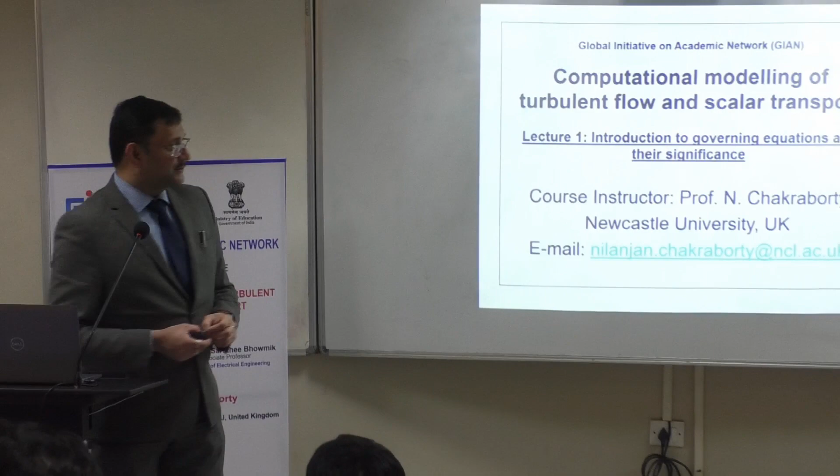In the first lecture, I'll talk about the governing equations and their significance. If we are interested in computational modeling, we will need to actually know the governing equations, because these are the building blocks, and based on that we can actually develop the concepts.

If you don't understand anything, please stop me there, okay? Roughly, the sessions are going to be one hour long, but it is not strictly one hour long, because I will take as much time as I need to actually explain the concepts. So please bear with me, okay?

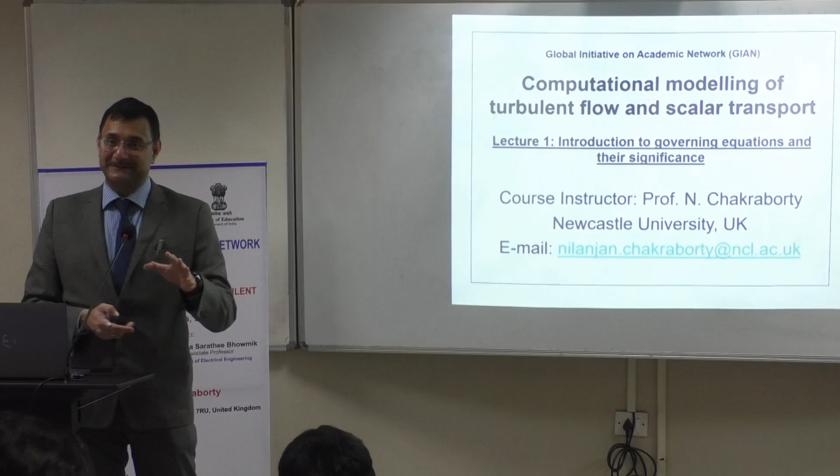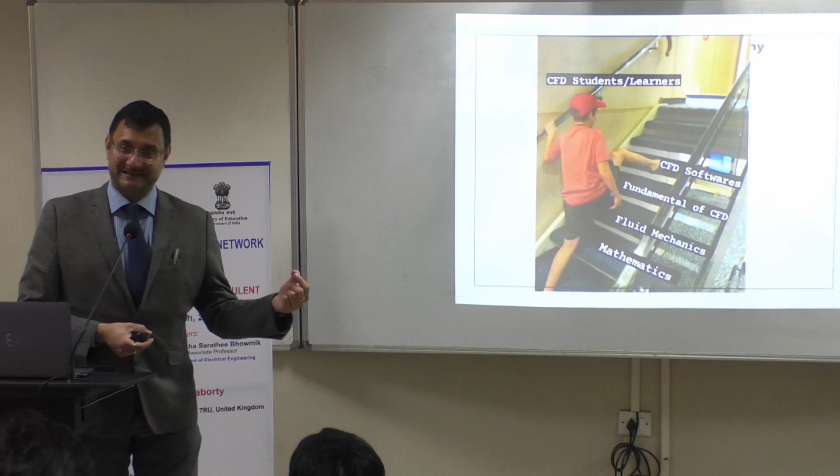Very often, whenever I see students looking at CFD simulations, I see this approach: they try to actually directly jump to CFD software without taking into account that CFD, computational fluid dynamics, is an interaction between mathematics, fluid mechanics, and the fundamentals of CFD, which is the numerical techniques. In addition to that, you have to consider the physics of fluid motion, and that's the part which I'm going to focus on in the next 5 days.

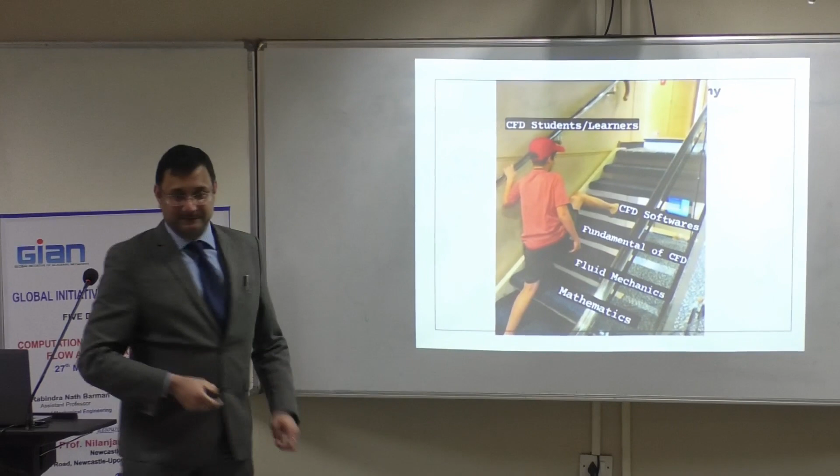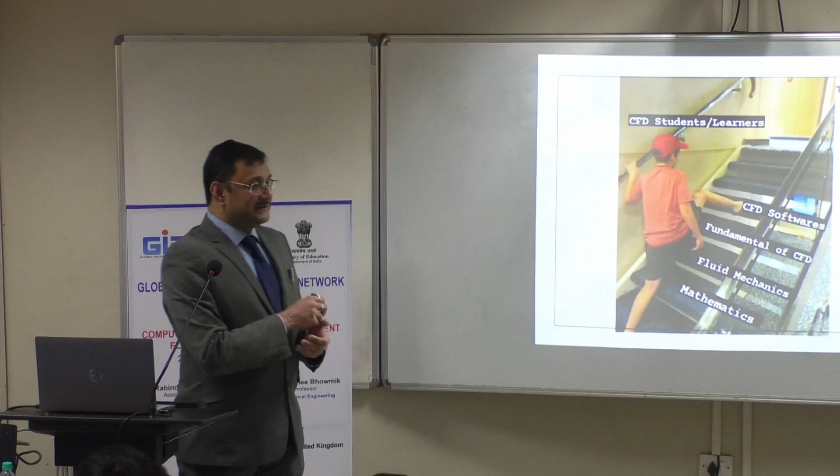Obviously, as the name suggests, I'm going to focus on turbulence modeling. But if you look at the books of turbulent flows, they mostly talk about how to actually deal with momentum transfer. They don't actually talk a lot about scalar transfer or scalar transport, and that's where the innovativeness of this course lies. You will see many of the things which I'm going to talk about in the next 5 days are not necessarily mentioned in standard textbooks.

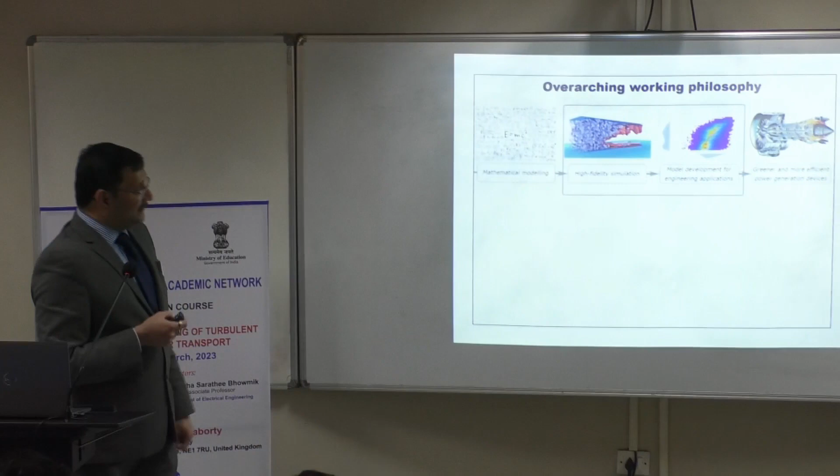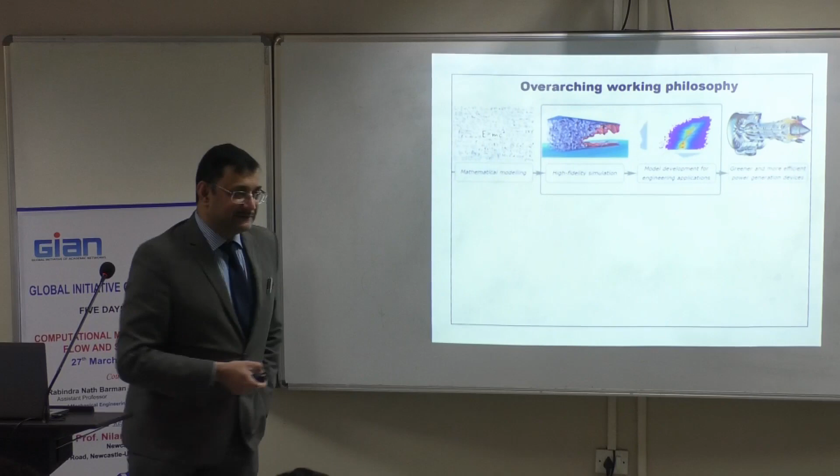So, effectively, this is the philosophy I believe in, and I believe more or less all the leading computational fluid dynamics research groups essentially believe in this kind of philosophy. Effectively, the mathematical modeling feeds into high fidelity simulation. High fidelity simulations effectively give you a huge amount of data. Intelligent data mining can lead to model development for engineering applications, and eventually they translate into engineering design of new devices.

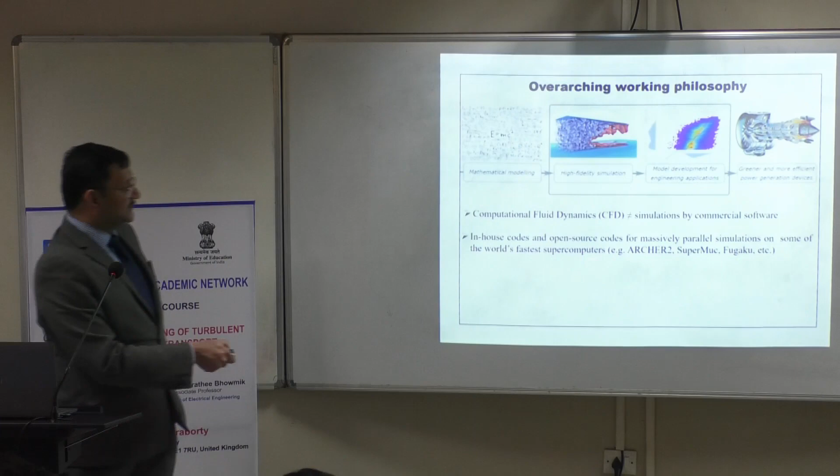This one used to be the world's second one, heavily used for CFD simulations. Frontier is number one at the moment, based in the US. The users of Frontier are some of the top CFD researchers in the world.

But in order to actually utilize these machines properly, you need to know the underlying physics of fluid flow. So essentially, that's my overarching aim for this course.

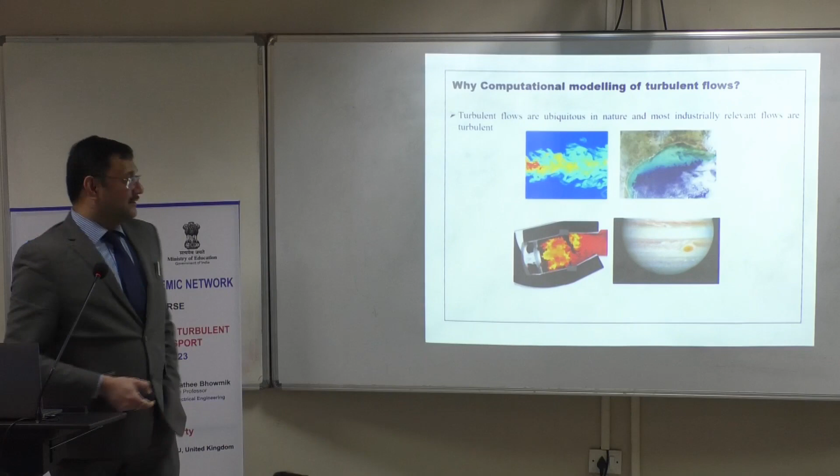So why computational modeling of turbulent flows? As you heard, it is ubiquitous in nature. Most industrially relevant flows are turbulent. You can see this is just a jet flow visualization, showing the turbulent, non-turbulent interface. If you look at Panama Bay on the top, you can see the same flow structures in this region. The same kind of thing qualitatively can be seen at a gas turbine combustor. And in astrofluids, if you think in terms of Jupiter's red spot, it is nothing but a large scale eddy.

So effectively the physics that we are talking about, you can imagine it is actually valid over a large range of length scales.

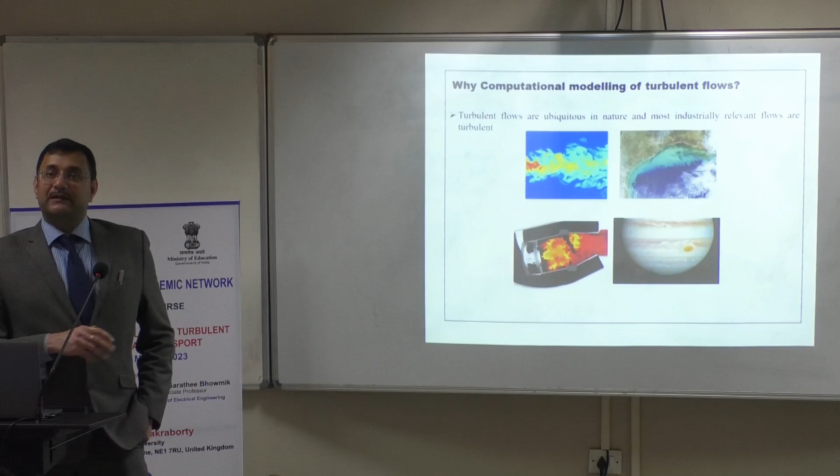Navier-Stokes equations are the most difficult equations known to mankind. The nonlinearity of the Navier-Stokes equations makes the analysis of turbulence a very difficult task. There's a $1 million prize if somebody can actually come up with an analytical solution of Navier-Stokes equations for all kinds of flows. Some mathematicians are still trying. We engineers don't care, we bypass the problem by solving the same equations by computational means. And effectively that's what we talk about. But you can actually appreciate how difficult it is.

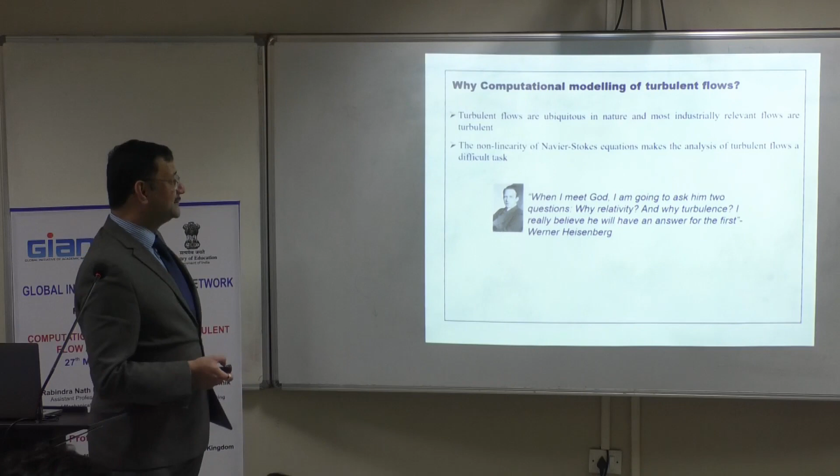Heisenberg once mentioned, when I meet God, I'm going to ask two questions: why relativity and why turbulence? And he believed that God will answer the first. So you can appreciate why we are talking about turbulence as one of the difficult problems in physical sciences.

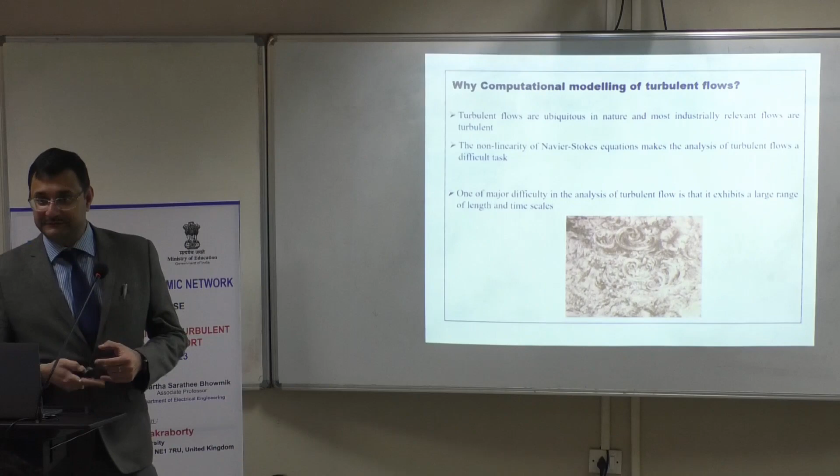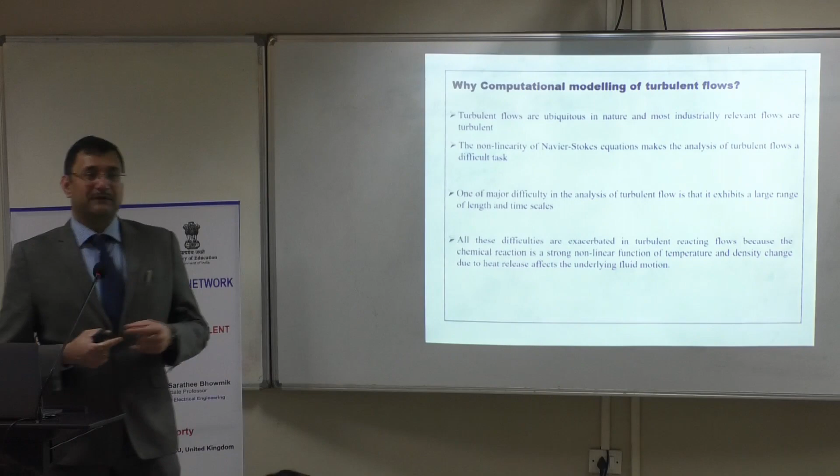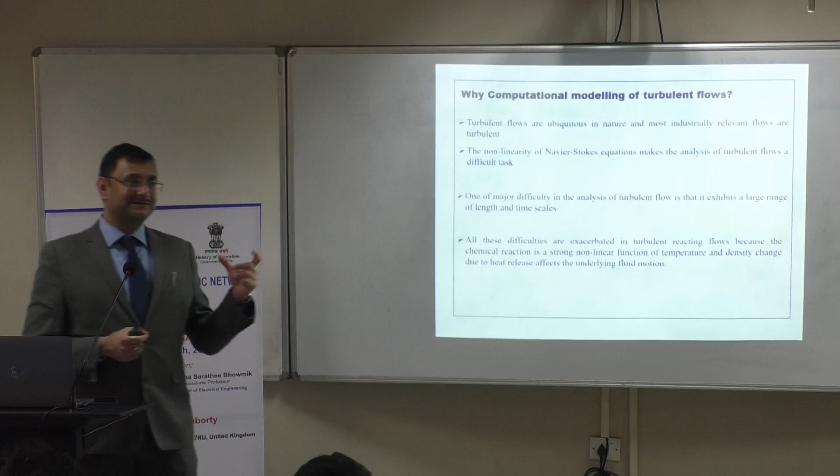So all these difficulties are exacerbated by the presence of chemical reaction in turbulent reacting flows, because chemical reaction is a nonlinear function of temperature and species mass fractions. In addition, if you have heat release it changes density, and that density effectively affects everything happening within the flow. So it is a closely coupled system. It will happen even in natural convection, but in the turbulent reacting flow, the interaction between the energy equation and the rest of the governing equations is much stronger.

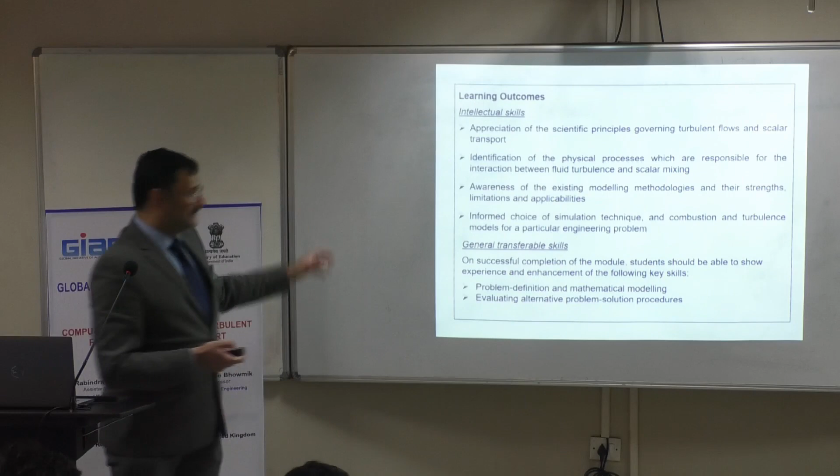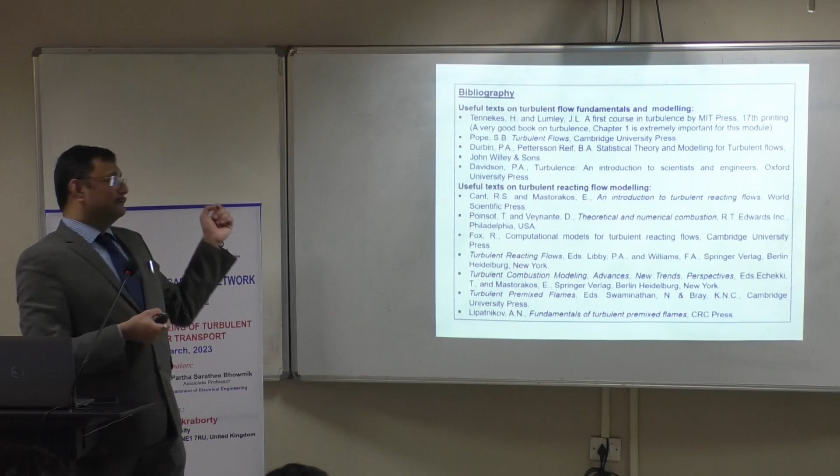I think this bit is important: everybody actually looks at turbulent flow differently because it's a difficult issue. Everybody approaches it from a different point of view. I've been very lucky to actually interact with some of the people who actually wrote these books. And very often, some of them were really annoyed if I was actually looking at somebody else's book.

So there are strong feelings between people. So personal preference matters in turbulent flow research, but we are talking about science here. So I have tried to filter out my personal opinion on the subject. I'll present you with the facts, but all of them are good books, even though some authors don't like other authors' books, there are advantages and limitations in all of them. Not expecting you to read all of them, but if you can, great.

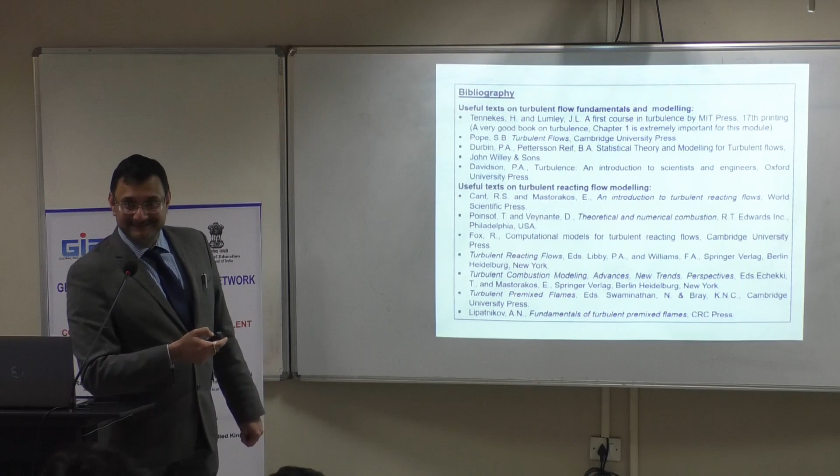So starting point: governing equations, numerical simulations, model development for engineering calculations - that's what the logic is. And that's basically the logic which I follow in my research.

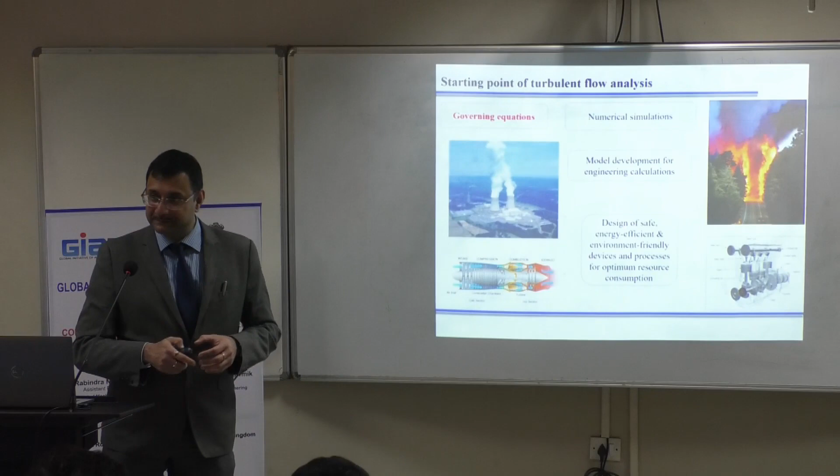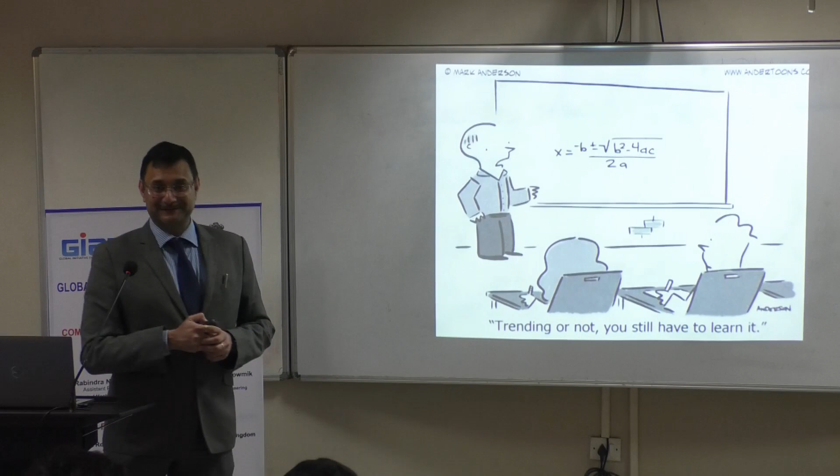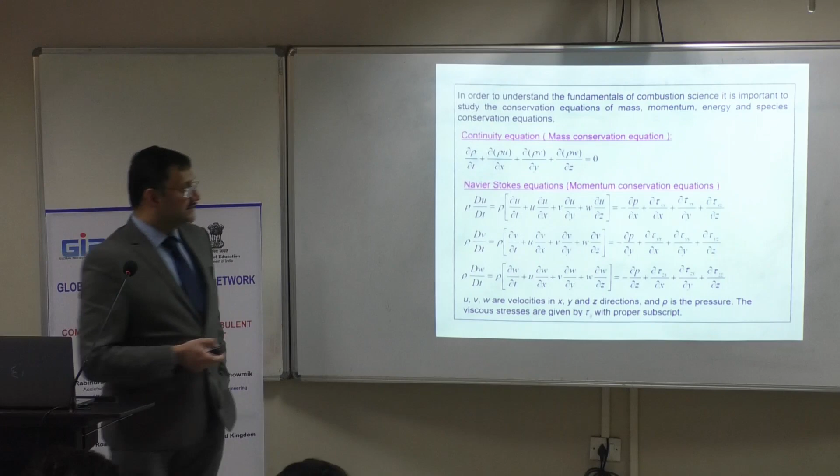So now we'll start talking about the equations. As the slide suggests, whether it's trending or not, you still have to learn it. Probably this is going to be nothing new for most of you, but I think it is important to recapitulate. We'll talk about mass conservation equation, momentum conservation equation. Altogether, all of these things are referred to as Navier-Stokes equations. I'll use tensor notation heavily later on, so I'll expect you to know about tensor notation.

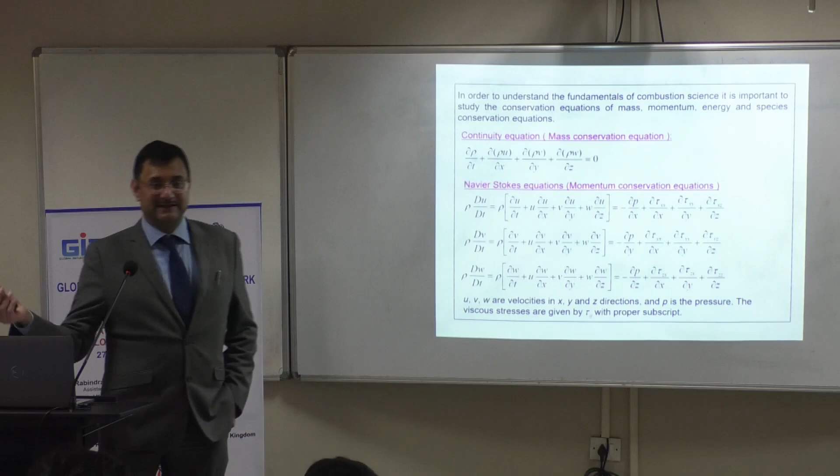Navier-Stokes equations are nothing but Newton's second law of motion written for fluids. In Newton's second law of motion, we generally write F equal to ma, F being the force, m being the mass, a being the acceleration. Here, effectively, what you are seeing is mass times acceleration divided by volume, that's why density appears. And that effectively means this side is force per unit volume on the fluid.

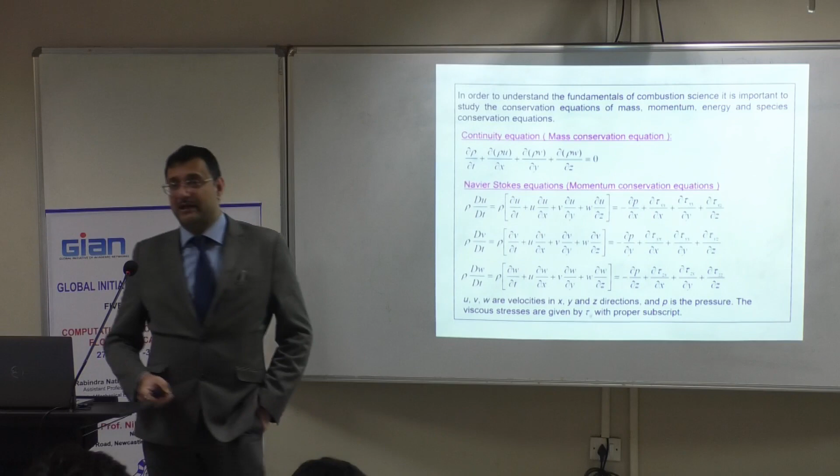Force comes because of the pressure as well as the viscous action, and on top of that you can have body forces. So that's what is referred to here.

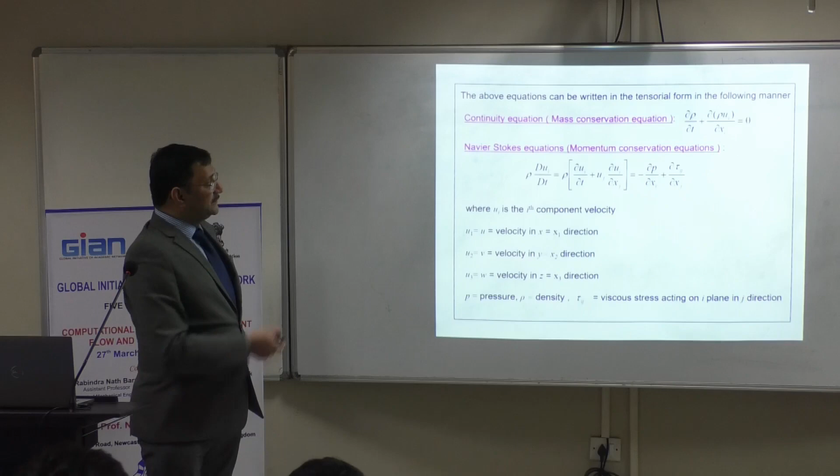I will use tensor notation as I mentioned earlier, so in tensor notation those equations can be referred in this manner.

Let's talk about the derivation of these equations, because I, both as a student as well as a researcher, found the derivations extremely insightful. If somebody just throws the equations at you, it's very dry stuff, because you don't have an appreciation for where the terms essentially come from. That's why I want to address this.

Most of us, when we were kids, played with little blocks and made some arbitrary shape. If we consider this as one of our little blocks, and this is a block of fluid, and we have several of them, we can make any flow configuration. So if our governing equation is valid for a small block, it should be valid for any arbitrary shape.

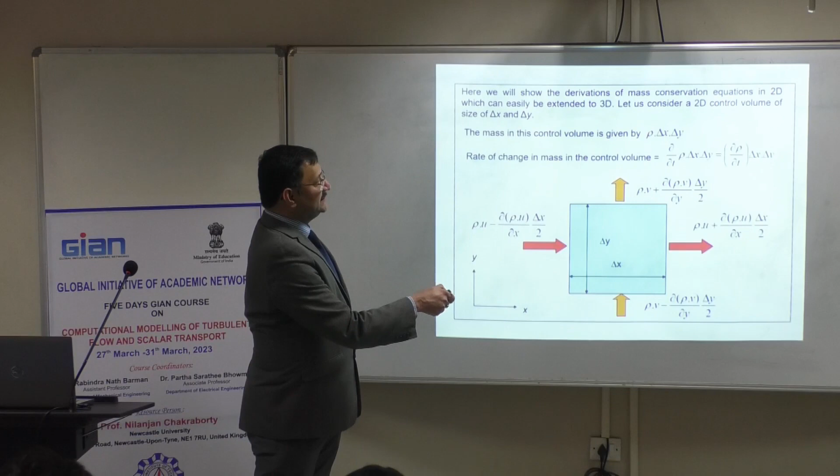The total mass within the control volume is density times delta y times delta x. If we consider unit depth normal to the board, then delta x times delta y times 1, which I did not show, is the volume times density, which gives us the mass.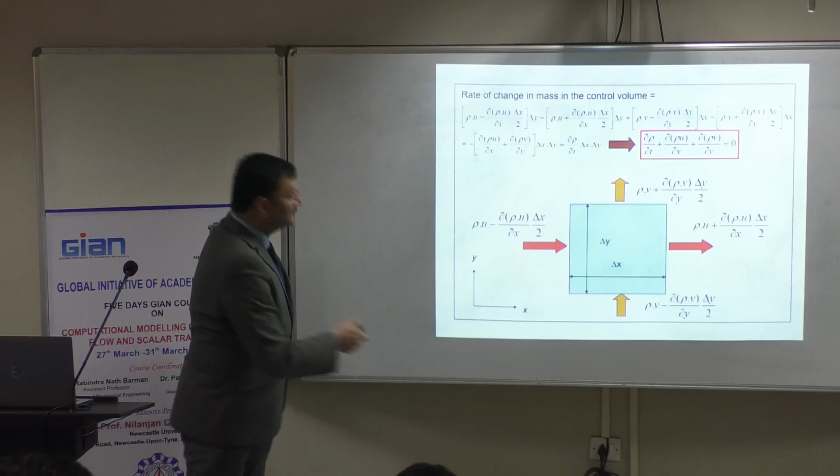Now, rate of change in mass within the control volume. This is the mass flux, so the area for that is delta y times 1. This one is coming in, that's why positive sign. This one is going out, that's why it's again multiplied with delta y because this is the area we're talking about, but with a negative sign.

For this one, the area is delta x times 1, but it's coming in, that's why positive sign. This one is going out, that's why negative sign. Clear?

If you do the algebra, it gives rise to the rate of change of mass within my control volume. Now, I have already drawn my control volume, so its shape is not changing with respect to time. The rate of change of mass within the control volume can only take place because of the rate of change of density within the control volume. That's why it's given by del rho del t times delta x times delta y.

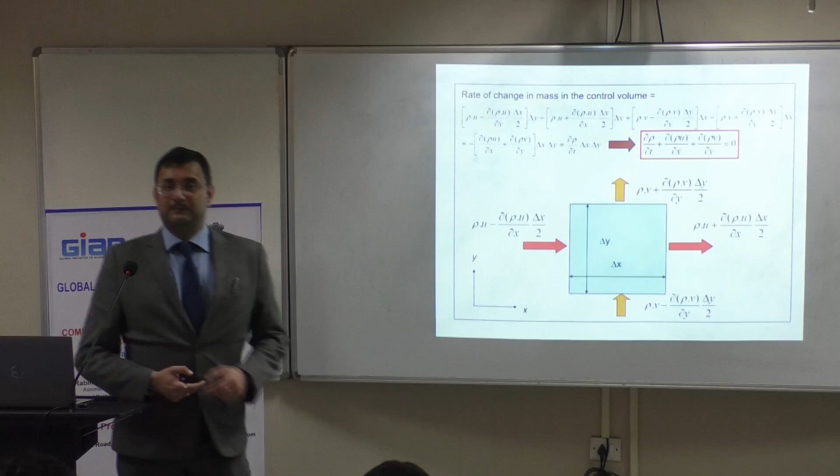If we consider these two together, ultimately we'll end up with this equation, which is our well-known mass conservation equation for 2 dimensions. You can do the same thing in the 3rd dimension and you will get the mass conservation equation. Any issues with that?

Now let's move to the momentum conservation equation. This time it will look a little bit different. Again, I'm starting from the center of this control volume. Let's consider the momentum — momentum is a vector, so we are considering only the x component, just for demonstration purposes.

Rho times delta x times delta y times 1, which I have not shown, gives us the mass for the control volume. Mass times velocity component u gives us the momentum in the x direction.

As I told before, I have drawn delta x and delta y beforehand, so the control volume is predetermined. So if I take the derivative, delta x times delta y will come out of the derivative — del t will only act on rho.

Rate of change of momentum — let's see what happens then. Rho u square is the momentum brought by the flow in this direction. But why del x times delta x over 2? Because I'm doing Taylor series expansion with respect to the middle point. Similarly, this one gives a similar contribution, but this time with a plus sign.

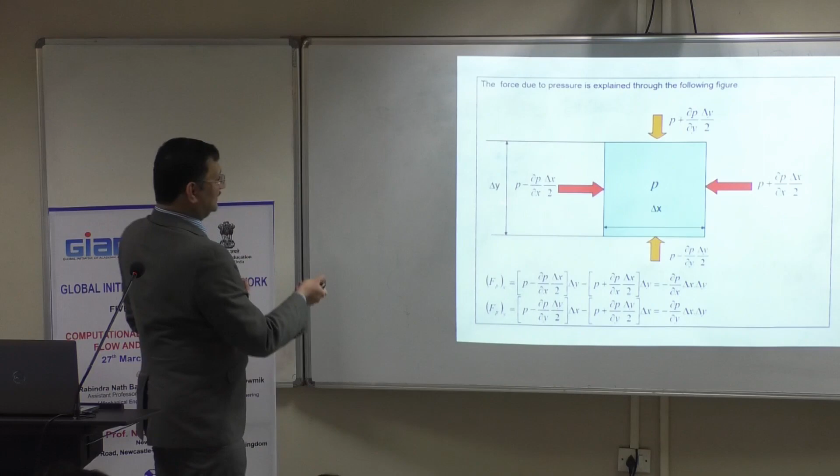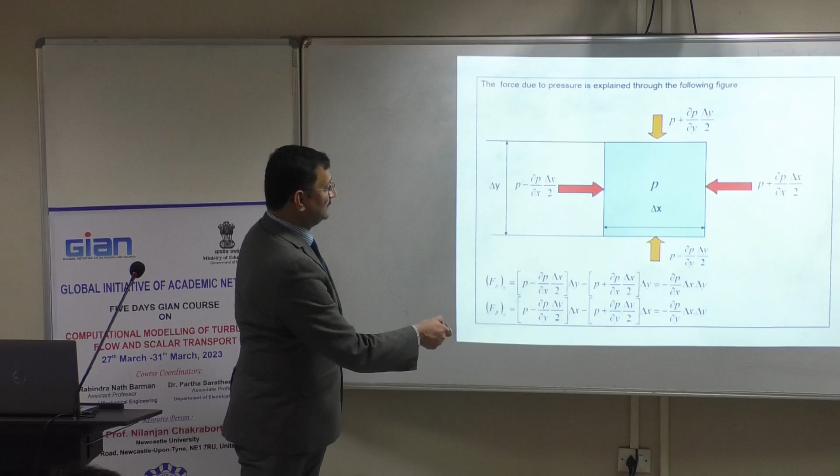Pressure always acts in the inward direction, so effectively it acts in this direction for this face, in this direction for that face. So the net force because of pressure in the x direction is this times this area, which is delta y times 1, minus - since we're talking about positive x direction but it's acting in the negative x direction - this times this area with a negative sign. After a little algebra we get this. Same concept: this works in the positive y direction times the area, this works in the negative y direction with the area, and you get this.

You must have seen this several times in your solid mechanics, Mohr's circle and so forth. But effectively we're talking about continuum mechanics - whatever you learned in the solid mechanics course applies here as well in fluids.

So tau xx is the normal stress coming because of the viscous action. Doing Taylor series expansion, it becomes tau xx plus delta. Similarly tau yy is the normal stress for the y direction - here it is tau yy plus delta yy delta y. You have shear stresses as well.

They are shown with the green arrows. So if tau xy is the shear stress in this direction, you know the complementary shear stresses. Effectively here it's going to be the other direction, tau yx plus delta yx delta x. Tau yx is working in this direction, meaning here the term looks like this.

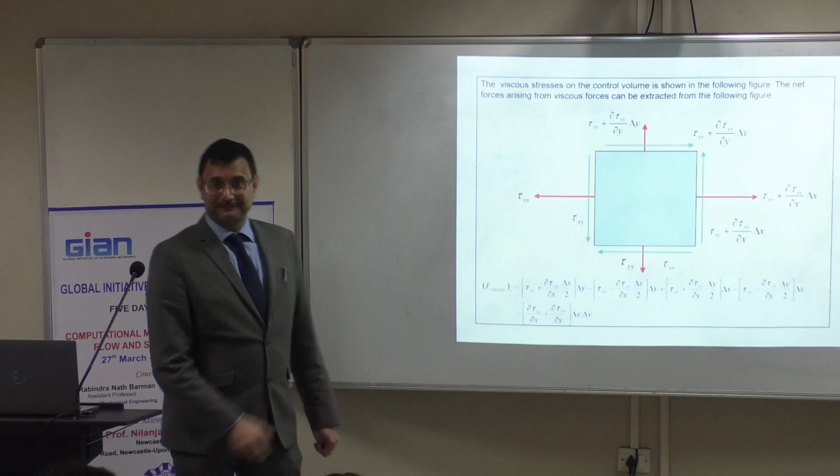Now if we're interested in the x direction: this stress times this area, minus this stress times this area - that's the positive x direction. But in addition to the normal stress contributions, we have to consider the shear stress contributions as well. So this green component times this area, this green component times this area, but in the negative x direction. If you do a little bit of algebra, it gives you this.

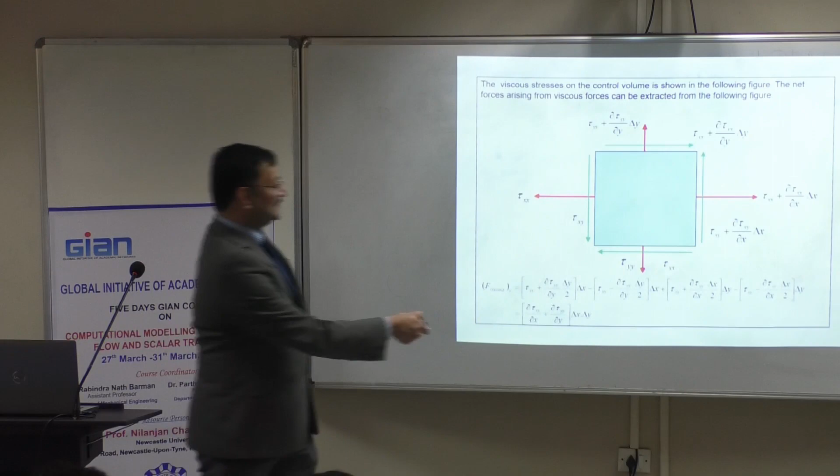Similarly, for the y direction, it is working in the positive y direction. So this times this area minus this times this area, because this is working in the negative y direction, and this one is working in the positive y direction. So this times this area, which is delta y, and this times this area, but with a negative sign, because it's working in the negative y direction, gives you this.

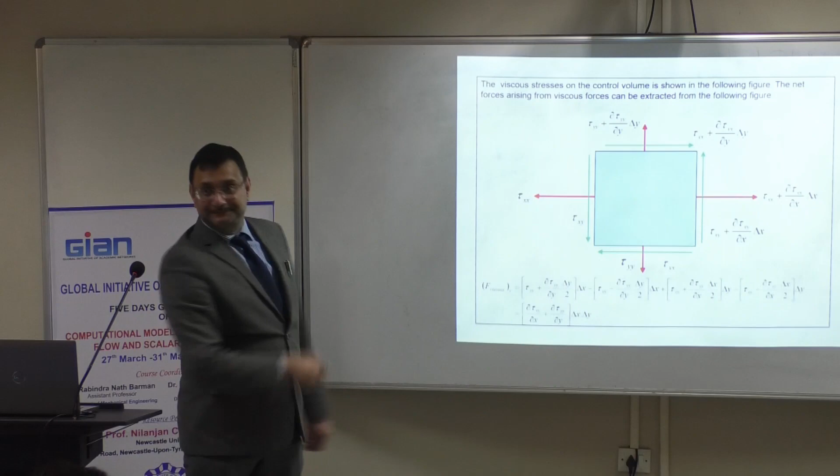But hopefully the idea is clear. Now, the way I have shown this equation, they are called conservative forms, because they are directly coming when I am considering conservation of momentum.

But we have already shown, because of the continuity or mass conservation equation, this is identically equal to 0. So I can actually drop this, to 0. But at this point, a cautionary remark: you can only do that for single phase flows.

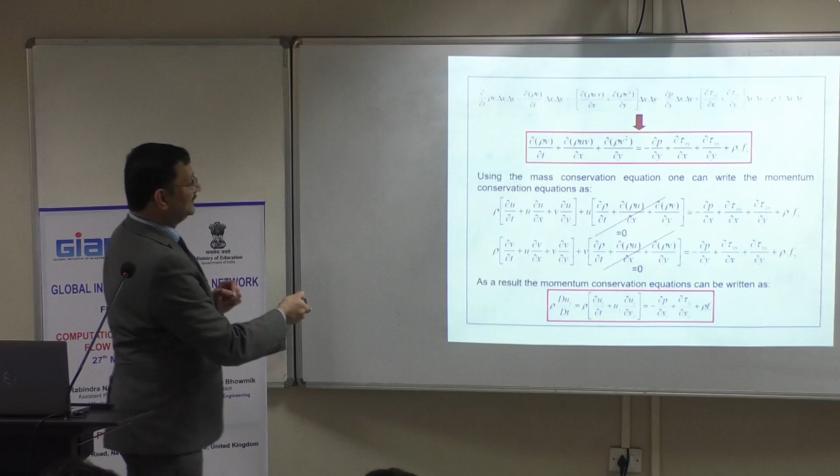But if you are writing simple single phase, then this part goes to 0, and effectively this equation boils down to this equation. In other words, this part is nothing but our well-known material derivative or substantial derivative or total derivative, whatever name you want to call it.

Just for completeness sake, because I have found in 20 years' time, sometimes these things are not mentioned. Maybe that's not the case for you, but I'm not taking any chances. But what's the difference between here I have the time derivative, and here I have a time derivative? What's the difference between these two?

Effectively, often in physics, we actually look at a given point in our system, and we are essentially seeing what happens at that given point. It's equivalent to, I have a pipe, I'm putting a probe at a certain location. So I'm actually seeing different fluid elements passing through that point at different time instants. Clear? And that's what I'm measuring.

That's called the Eulerian frame of reference. So effectively, when I'm talking about this term, I'm looking at the change in velocity with respect to time in the Eulerian frame of reference. For convenience sake, we generally use the Eulerian frame of reference in fluid mechanics most of the time.

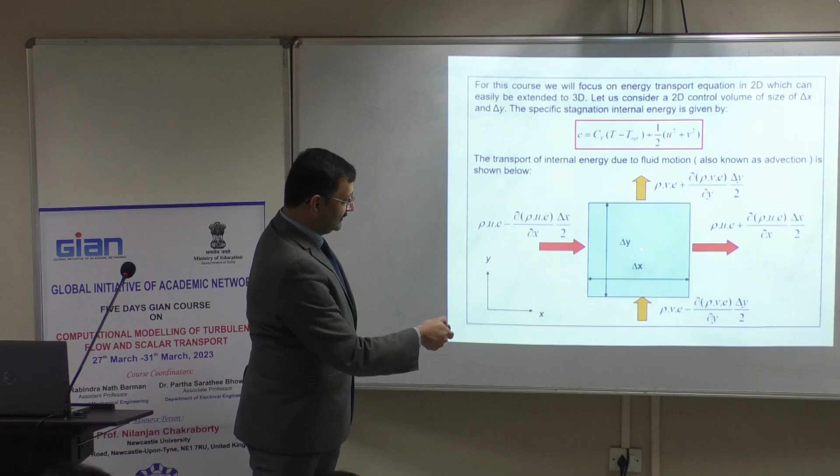Ignoring the higher order terms, here it becomes plus, here it is negative, because I'm doing it in terms of this direction, this distance, that's why minus del y over 2. Here the component is plus. Clear?

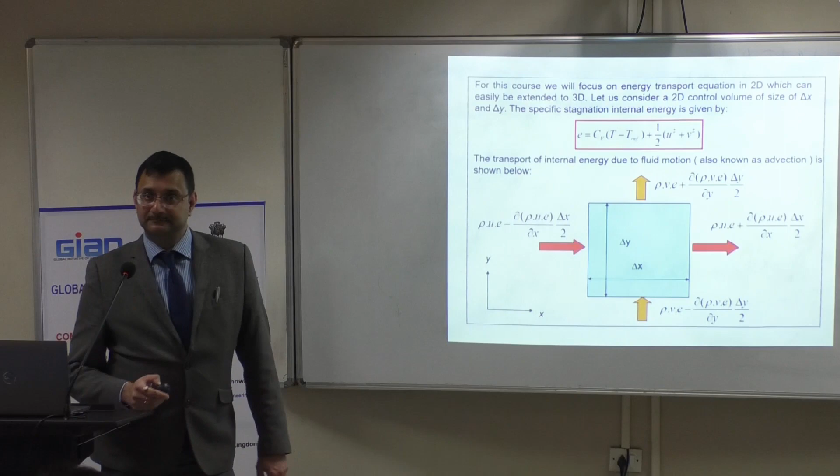I'm doing first law of thermodynamics once again. Think about your bank balance this time. There are ways to actually express first law of thermodynamics, but ultimately it is nothing but bookkeeping of energy.

If you understand how your bank account works, you know how first law of thermodynamics works. Heat transfer is your income, that comes in your bank. You actually spend for your mechanical work. The flow is bringing some amount of energy, so this gives a positive contribution when multiplied with the corresponding area. This is going out, that's why negative sign. This is coming in, so this times this area positive. This is going out, that's why. So all incomings have positive sign, all outgoings have negative sign. That's what happens in your bank account, isn't it?

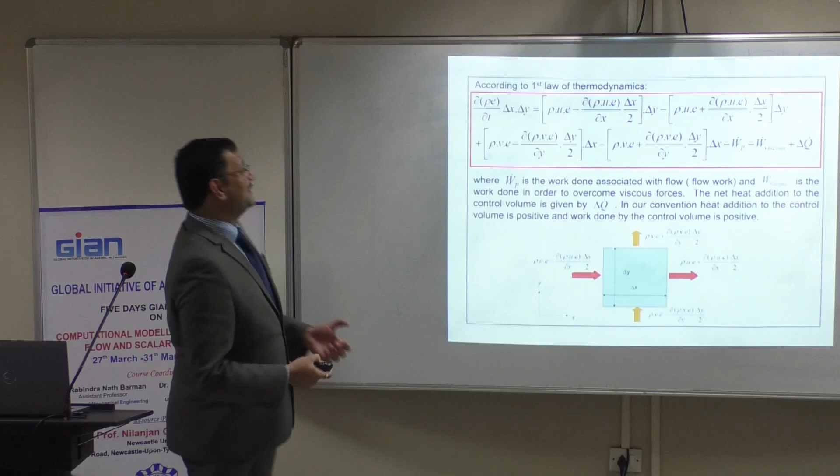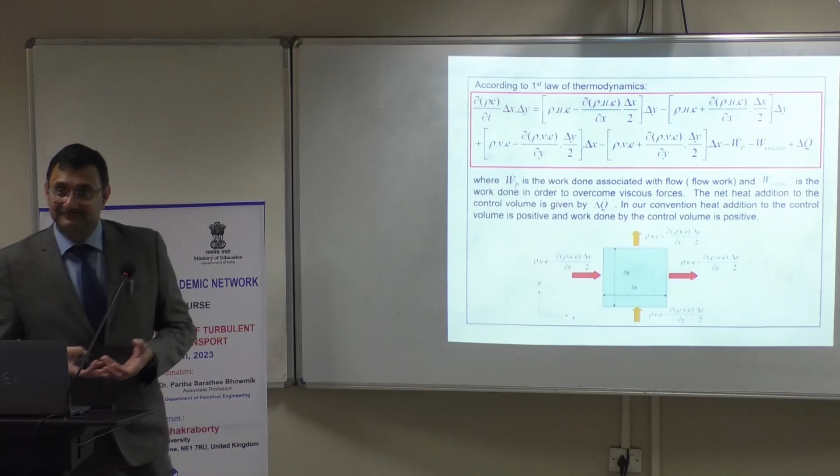If the net contribution is positive, our control volume becomes richer in terms of energy. If your income is greater than your expenditure, your bank balance goes up, you become richer. In our context, the system becomes richer in terms of energy, reflected in rising temperature. If your expenditure is greater than your income, your bank balance goes down, you become poorer. Similarly, our system becomes poorer in terms of energy, reflected in decrease in temperature with respect to time. That's all it is.

Let's find out heat transfer. So I have, let's say, this is volumetric heat generation that can be heat released into combustion or reacting fluids. Can be something else as well.

If I consider this is my diffusive heat flux and Qx is the value at the middle of the domain, heat flux is a vector, that's why subscript x and y. So this is the value on this face. Again, I'm doing Taylor series expansion. Similarly, this is the value on this face. For the y component, this is the value for this face. I have explained several times, so I'm not repeating it again. And for this one, similar things, but with a positive sign.

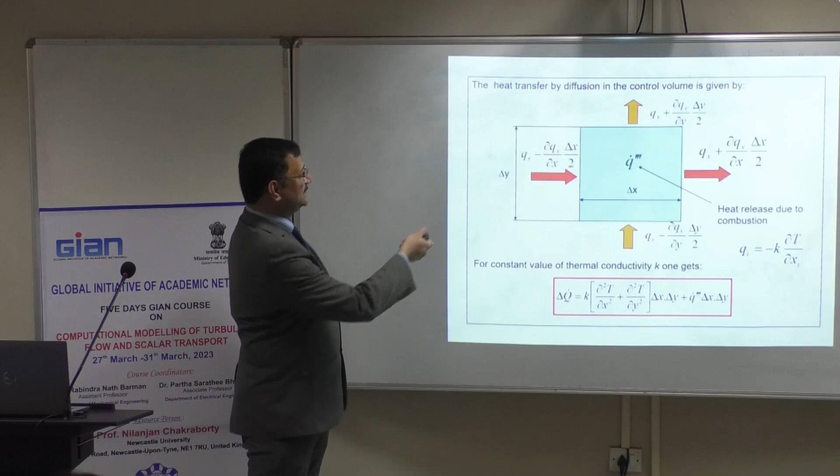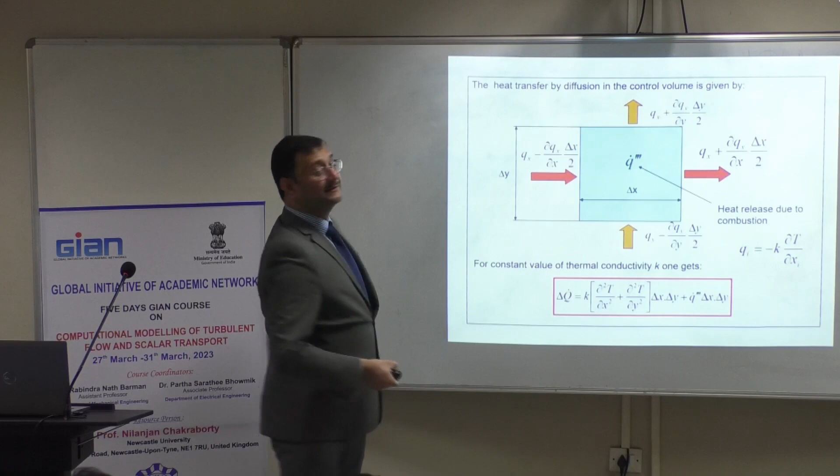Clear? Net contribution, whatever is coming in. So if this is coming in, this times area, this is going out, so this times the area subtracted. This is coming in, so this times this area with a positive sign, this times this area negative sign. And then if we use Fourier's law of heat conduction for the heat flux components, we end up with this.

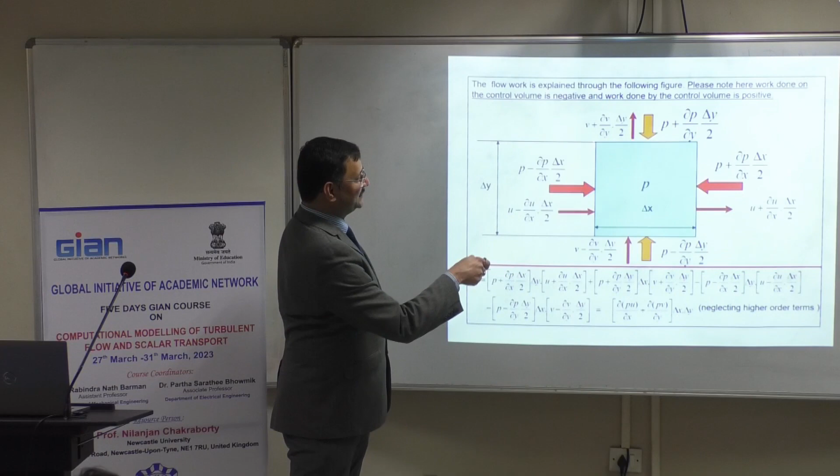Because we are talking about power here, we are not talking about work. That's why the velocities are coming in rather than displacements. So this one will give you negative work, this will give you positive work, this will give you negative work, this will give you positive work. And how do you get the work? Essentially, this pressure times the area gives you the force, force times the velocity gives you the power. And if I do this, then I'll end up with this expression.

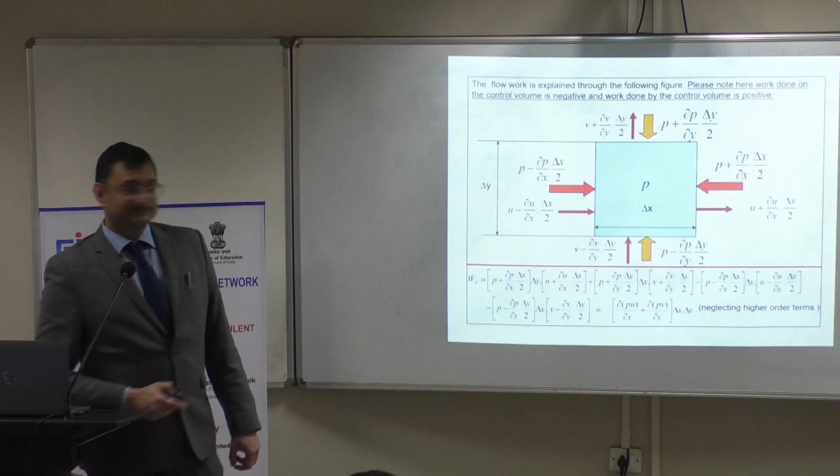Viscous forces and the velocities are shown here as well, same convention as before. So if you actually put the same convention, again multiply the stresses with the corresponding area, after a little bit of algebra, you will end up with this.

Now, if we put all of those things into our energy conservation equation, this is what we get, dx. That's the complete form of energy equation.

In the literature, there are various ways of writing the energy equation. Each one differs from another by a slight amount, which often confuses people. But effectively, all of them are talking about the same thing.

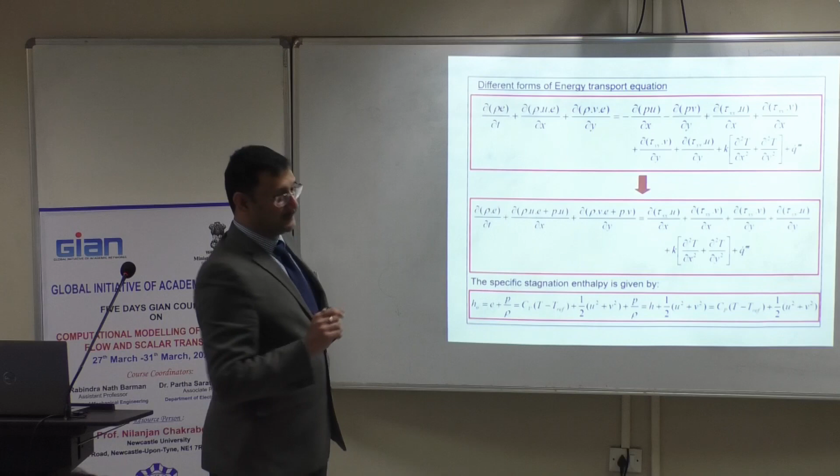You can appreciate these terms are basically originating from fluid coming into the control volume and going out of the control volume. This is essentially telling the transport process by virtue of fluid motion, which is often referred to as the advection process.

These terms originated because of thermal conduction or thermal diffusion. They are referred to as the thermal diffusion term.

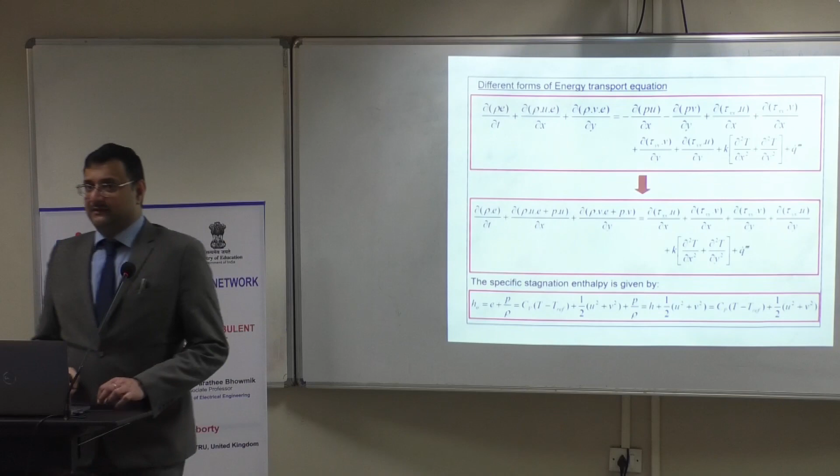These two terms, the pressure contributions, are essentially the contribution the flow needs to make in order to sustain the flow. It's the flow work part. And this is the viscous work part. Effectively, because of that action, mechanical energy converts into heat energy.

So if I actually take these terms on the other side, we will get this, and that gives us the specific stagnation enthalpy, where Cp is the specific heat at constant pressure.

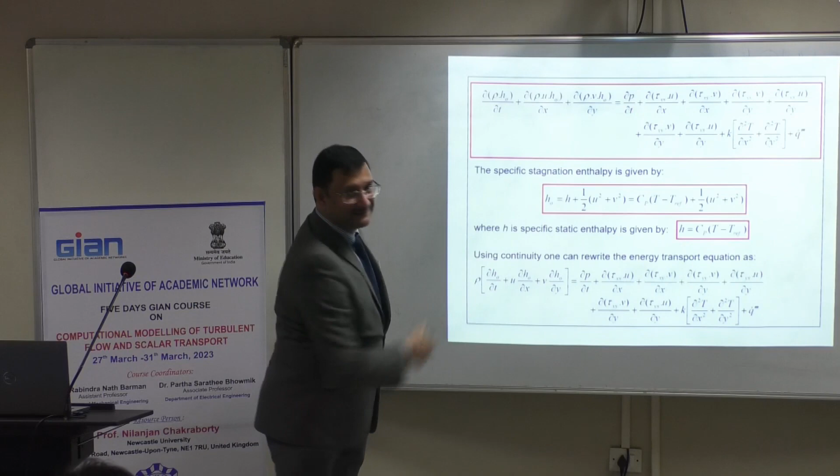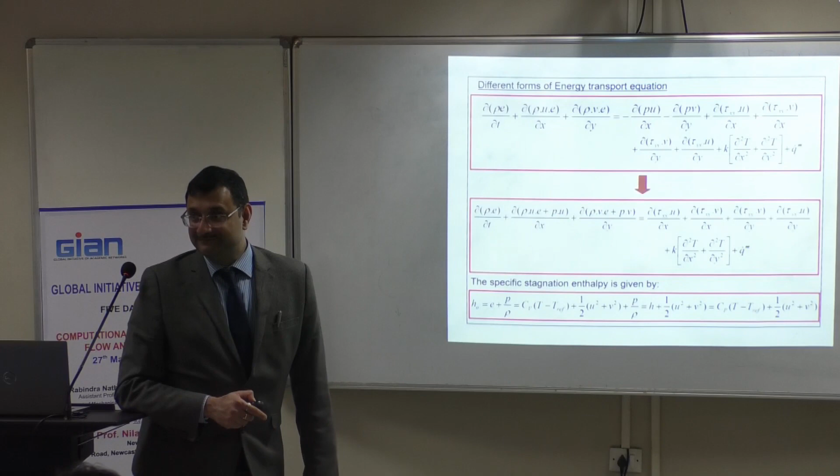And then one can actually write this equation. But please note, this time there is a sole del P del T term on the right hand side, which was not there when I wrote this in terms of the specific stagnation internal energy. Everything else looks more or less the same, but suddenly one extra term has originated. It's talking about the same physics, just writing the equation slightly differently. So please keep that in mind.

If I write this equation for static enthalpy, at the moment it's written for the specific stagnation enthalpy as shown here. And if we use continuity once again, this is written in conservative form, you can get this equation.

Because of the chain rule, effectively this part will boil down to this. And if you write the same equation now by expanding the kinetic energy part, and for these parts effectively use the momentum conservation equation.

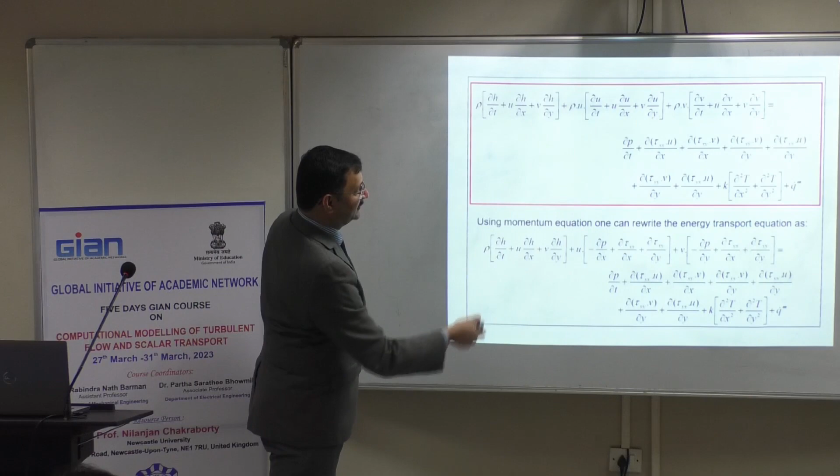So you replace this on the left hand side. You can compare, this is the right hand side corresponding to this. Take the left hand side, it's the corresponding right hand side. This boils down to this, and you get this expression. Again, the same equation physically remains exactly the same thing, but looks slightly different.

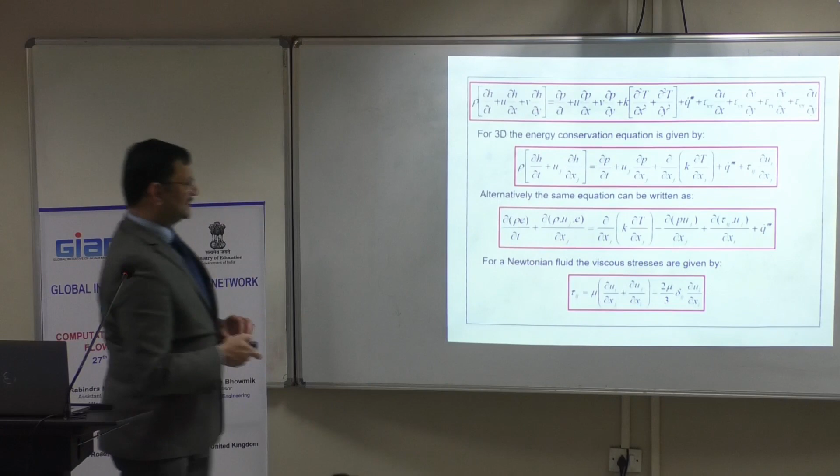Alternatively, you can actually write the same equation in this form. Now, you need to appreciate one important thing at this point. So far, whatever I have talked about...

...is valid for all kinds of fluids: Newtonian, non-Newtonian, incompressible, compressible. Single phase is the only limitation. Otherwise, you'll have some extra terms.

At this point, this is the first time I'm making an assumption. So what exactly is the contribution by del P by del T here? It depends on which application you are seeing. If you have a non-dimensional number called the Eckert number, and it's a very high Eckert number, you will have that contribution playing an important role.

In the case of incompressible fluid, that contribution is often negligible. Essentially, you can drop quite a number of terms from this equation. If you do an order of magnitude analysis, you will see this term and this term often will drop out. But that is not necessarily the case when you are talking about compressible flow or high-speed flows. This term may play a very important role for very low Reynolds number flows.

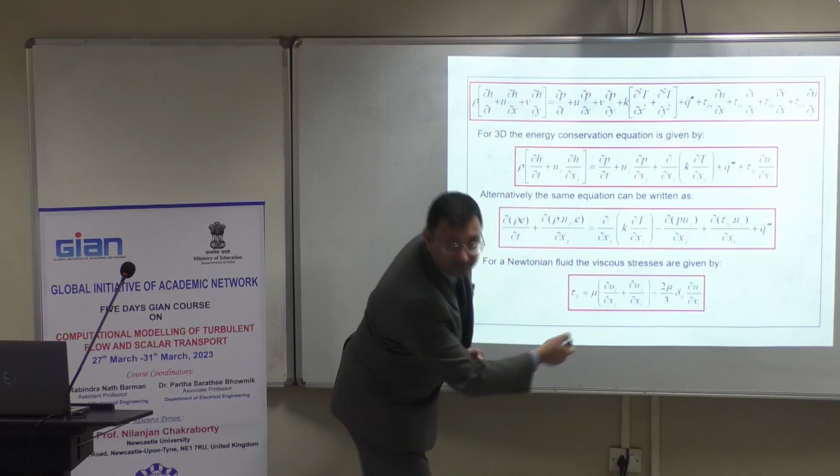If I'm dealing with a non-Newtonian fluid, this relation will change. So the resultant equation from this point will differ depending upon the fluid that you have. For incompressible flow, this contribution will go away, because the divergence of velocity field, we can show for incompressible fluid, divergence of velocity field goes to 0.

Now, if you are dealing with reacting flow, like combustion, the volumetric heat generation is not constant. It changes from one place to another. How can you actually express that?

Let's say I can actually express that with a fuel reaction rate times the calorific value of the fuel in this manner. Why negative sign? Fuel is a reactant, it's consumed, so this quantity has a negative sign. So negative makes it positive. It releases heat.

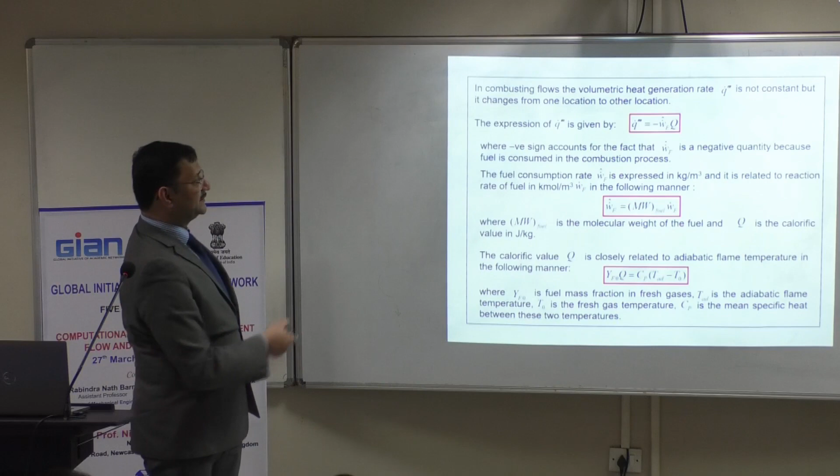How do you get that? As indicated, this one is expressed in kg per meter cube, and here effectively this one is in terms of kilomole per meter cube, and this is molecular weight.

How is Q considered? In this manner, YF0 is the fuel mass fraction in the unburned gas. Cp is specific heat at constant pressure. T0 is the unburned gas temperature, and T adiabatic is the adiabatic flame temperature.

If you have done chemical thermodynamics, you should be able to relate to those. So effectively, if you have a chemical reaction like this, you can write this quantity like this, and your Q becomes this, if A is the fuel.

This quantity, which is the volumetric heat generation, is expressed as the summation of the heat of formation and the reaction. Clear?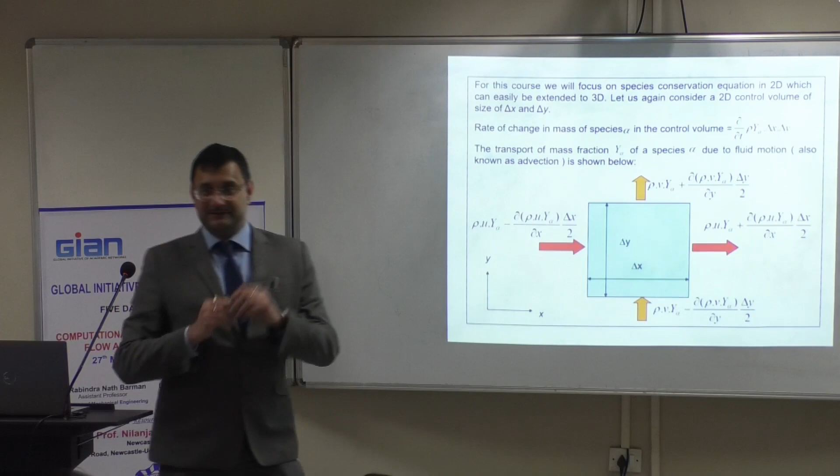But if you have a mixing problem or a chemically reacting system, we have talked about mass conservation, momentum conservation, and energy conservation. That's not enough, because we need to consider species conservation as well, since you will have different concentrations of different reactants or products at different locations. That's why we have to consider species conservation.

Species conservation is very similar to mass conservation that we discussed earlier. When talking about species conservation, think about this control volume. Once again, rho times delta x times delta y times unit depth gives you the total mass of my control volume. Y alpha is the mass fraction of species alpha.

So the amount of alpha remaining within the control volume is given by rho y alpha delta x times delta y. The rate of change of that with respect to time is given by this. I have already explained delta x and delta y are constant because I defined my control volume like that.

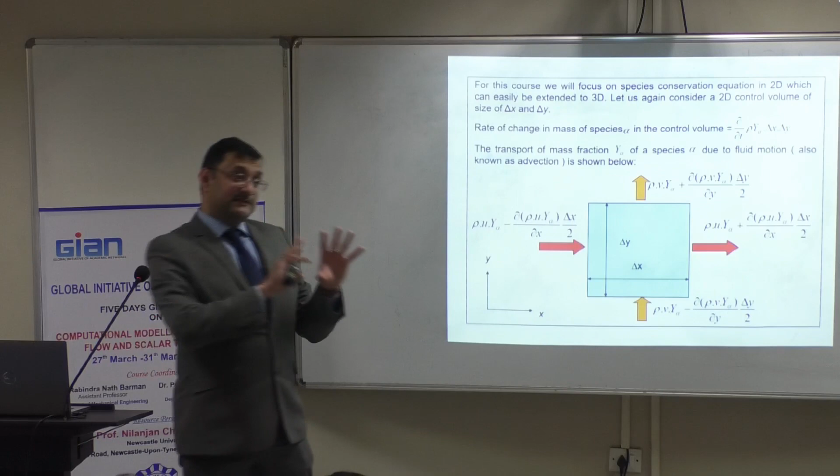This comes from what I talked about, the Eulerian frame of reference. That's why I have considered my control volume as predetermined. I could change the shape of my control volume as a time-dependent thing, which would bring extra terms into my consideration. Most of the time I don't need that, but that option is there.

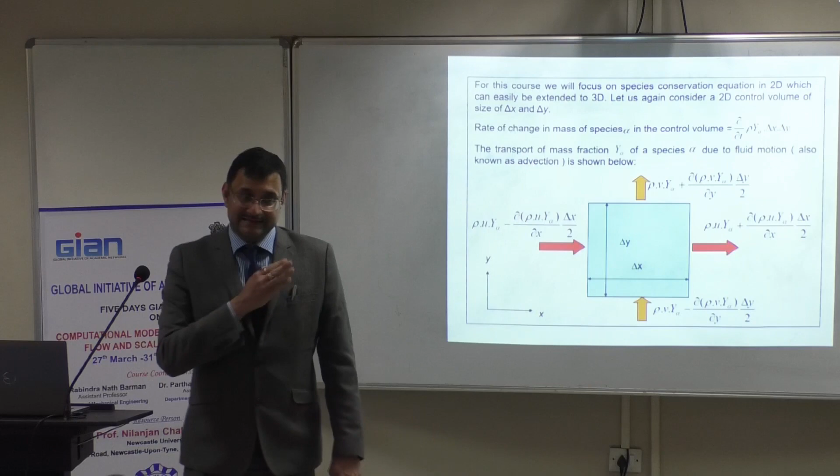Rho u y is the mass flux because of the fluid motion in the x direction. Similarly, rho v y is the mass flux in the y direction. I'm doing Taylor series expansion once again from the center of the control volume, and that's why I'm getting this contribution, this contribution, this contribution. I've discussed it enough, so hopefully you can follow that.

Now, this is my mass transfer flux. Again, if I consider mx and my at the center of the control volume, these are the mass fluxes in the x direction, y direction boundaries. And I have generation rate or destruction rate of alpha. Clear?

How do I define that mass flux? Using Fick's law, to be specific, Fick's first law of diffusion. But there are, again, at this point, I am making an assumption. There are more complex, more detailed ways to actually express that.

So, now, once again, that bank account analogy. Whatever is coming in, positive sign; whatever is going out, negative sign; plus whatever is generated. Unfortunately, that doesn't happen in your bank account. It would have been very good to have that, right? So once you do the simplification, you end up with this, and that brings us to this equation.

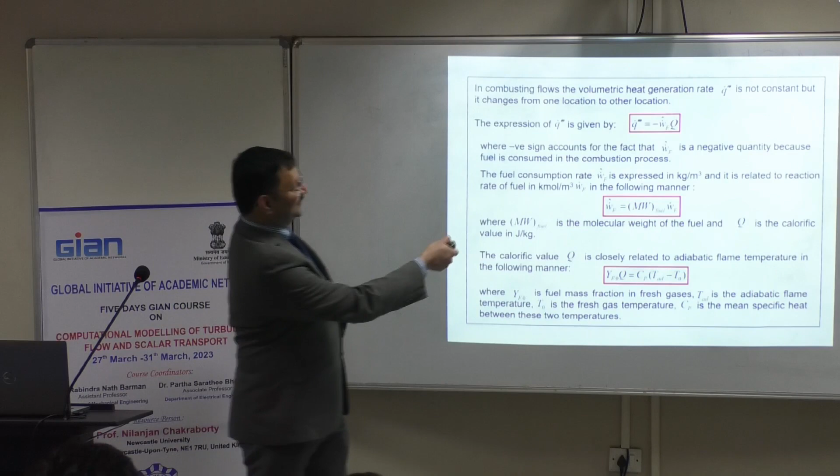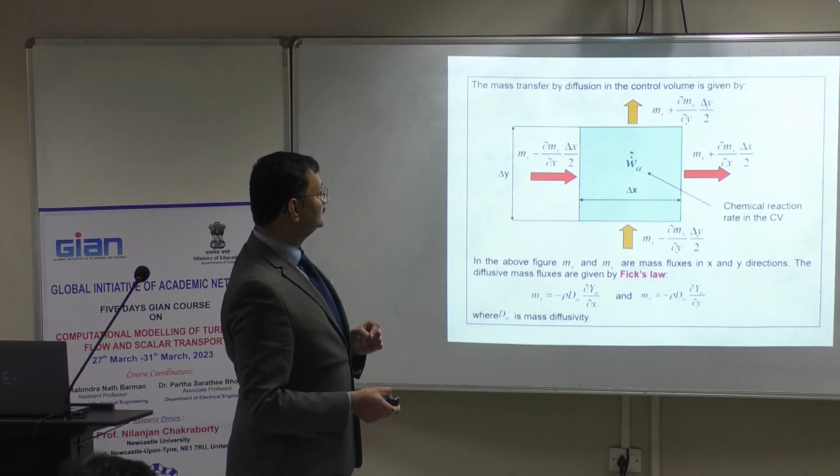This term is related to, you may remember, the heat release term. So that means if the reaction rate changes, it changes. These are the stoichiometric coefficients, the balanced chemical reaction. So please keep in mind what I was telling, that this changes the chemical reaction. Chemical reaction essentially changes the heat release rate term. If heat release rate is changing, that will affect temperature. Temperature, through the state relation, like ideal gas law P equal to rho R T, will change density. Density will change, will induce change in velocities.

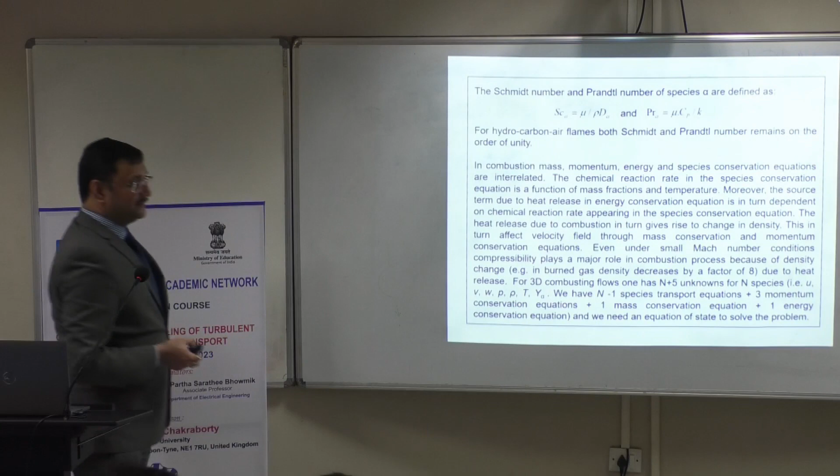So it becomes a completely coupled system. So when you are talking about turbulent reacting fluids, effectively, even for small Mach number, density change can be 8-fold in hydrocarbon combustion or hydrogen combustion. So you have to consider the change in density as well.

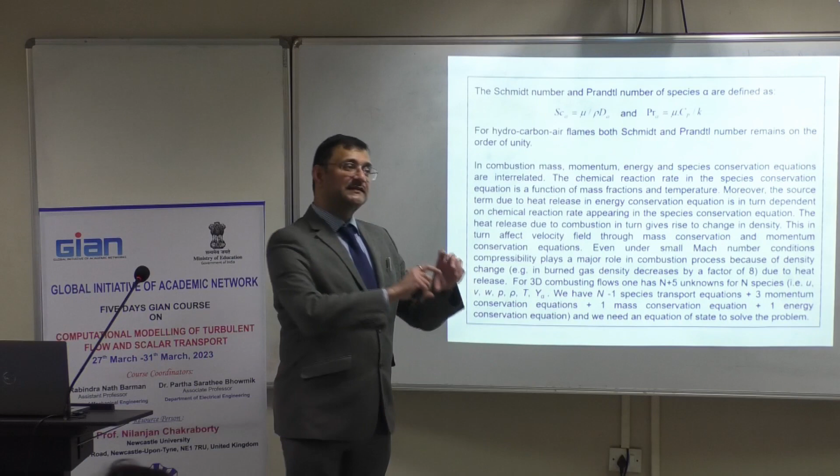So effectively, you need governing equations for U, V, W. These are your unknowns. You need pressure, you need density, you need temperature, you need species mass fractions. So how many of them? 3, 4, 5, 6 plus n number of species. But if I sum all the species mass fractions, I'll get unity. So I don't need n number of species equations, I just need n minus 1 number of species equations. So that means I have all n plus 5 unknowns for an n species system, and effectively for gaseous phase combustion often we use P equal to rho RT.

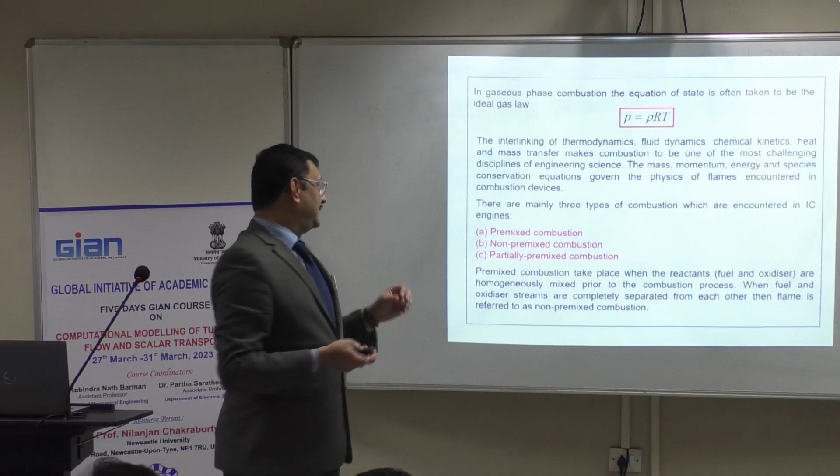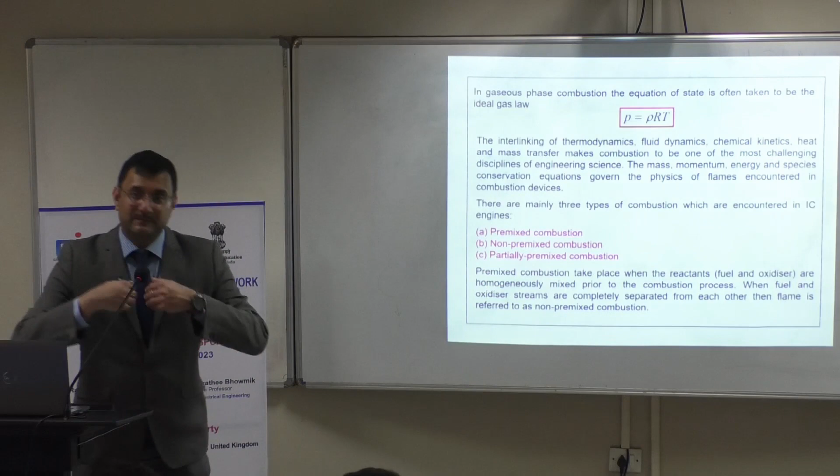Just for completeness sake, these are the 3 major modes of combustion. Premix combustion, where the fuel and oxidizer are homogeneously mixed prior to the combustion process - that's what happens in spark ignition engines. In the case of diesel engines, if your fuel and oxidizer are completely separated from each other, that's non-premix combustion. Very often nowadays in engines, essentially you go towards partial premix combustion. In direct injection engines, they are injected separately and allowed to mix somewhat before the combustion process is initiated.

So effectively, at the end of the lecture, we should have basically nuts, bolts, tools, and hammers. We have got to actually handle the actual problem. With that, I'll stop.

Happy to answer those. Anything?

Sir, in reactive flow, how is this phase change calculated? Because so far I'm talking about single phase fluids. You can have, if you consider pure premixed flames in gaseous phase or non-premixed flames in gaseous phase, whatever I have mentioned is sufficient. If you are talking about droplet combustion, there will be extra source terms coming in. So what are examples of chemical reacting flow where phase change is not occurring? In SI engine, spark ignition engine, what happens in your cylinder is you have fully vaporized fuel and oxidizer homogeneously mixed. We are already assuming that fuel is already atomized - that happens in the pre-chamber or in older ages in carburetors. When you are dealing with it within the system, it's already single phase. In gas turbine combustion, when the combustion actually takes place, it's often a single phase process.

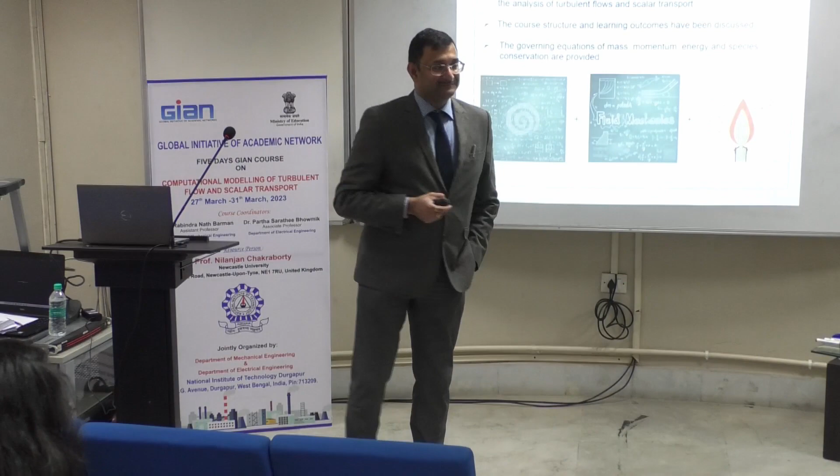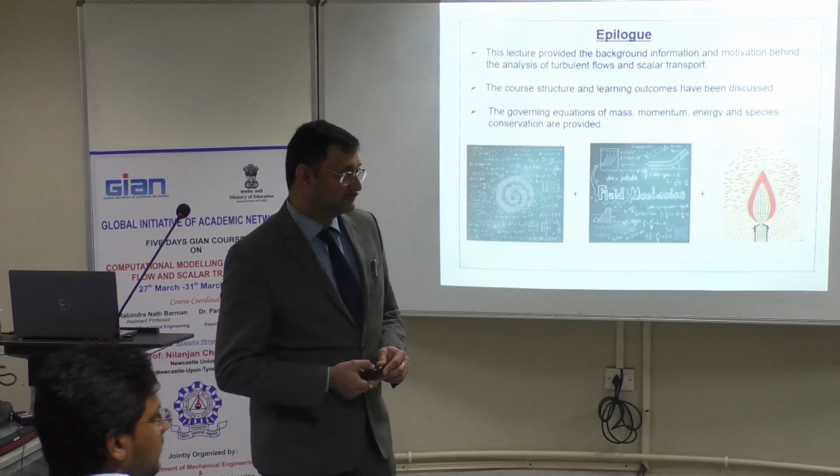Mass flow rate is not a vector, but mass flux is a vector. Just like heat flux is a vector, mass flux is a vector as well. So where we actually wrote, this is for the x component, this is for the y component.